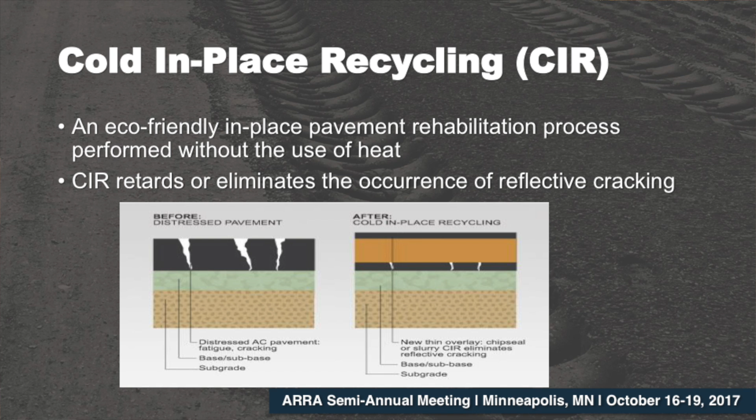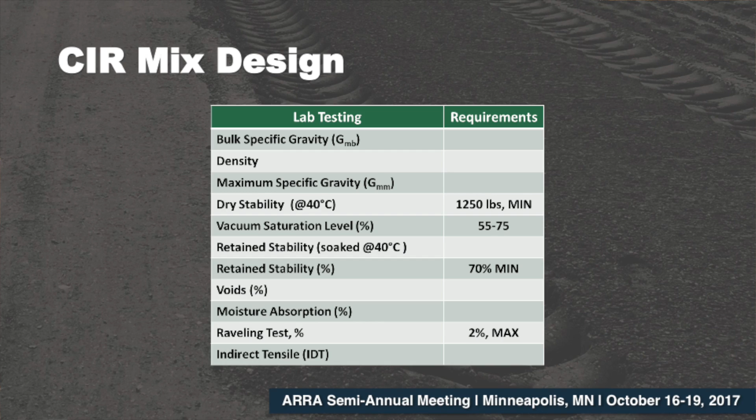So again, we're talking about cold-in-place recycling, partial depth rehabilitation with 100% RAP. Its main purpose is to retard or hopefully eliminate the reflective cracking coming back from the underlying pavement that's left behind, and it has shown phenomenal performance across many agencies within the state for many decades, as it has been improved over that time frame. This is just a quick look at the mix design criteria, and you can see that not all the standard criteria developed as the original guide spec out of Koch Materials is there. The indirect tensile test was not part of it, but you can see that the raveling test and the retained stability and the dry stability is a key component.

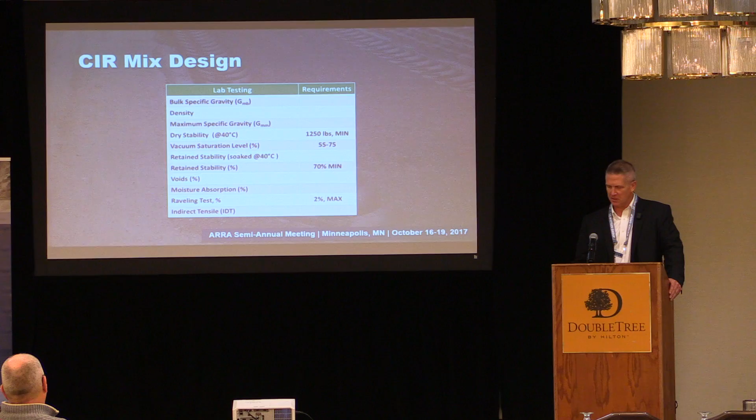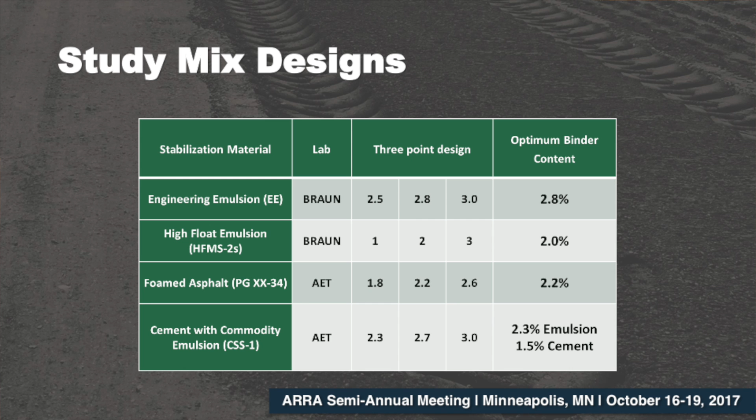So really, to set up these designs, we wanted to look at the most commonly used stabilization materials in Minnesota, and those are engineered emulsion, high float emulsion, foamed asphalt, and cement with commodity emulsion. Braun Intertech did the designs for the engineered emulsion and the high float emulsion, and AET did the design for the foamed asphalt and the cement with the commodity emulsion. As you can see here, they were all three-point designs, and the optimum binder content was determined with that three-point design, shown here on the right: 2.8 for engineered emulsion, 2.0 for high float emulsion, 2.2 for foamed asphalt, and 2.3% emulsion and 1.5% cement with the cement plus emulsion design.

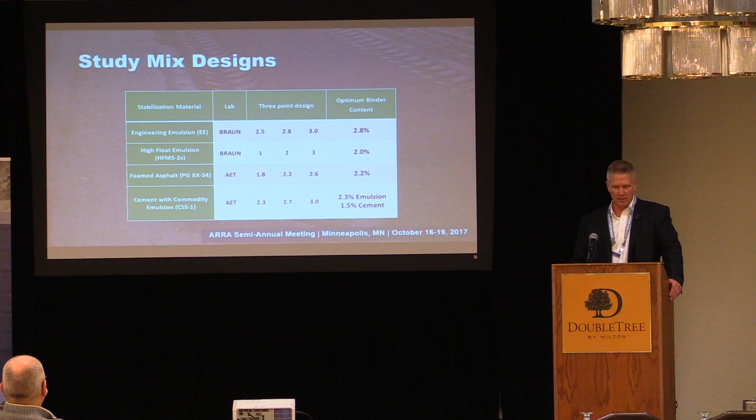So the whole purpose here was to take the designs of these different stabilization materials in the CIR environment and then look at fracture energy as a potential improvement in performance testing, not just for relation to crack resistance, but also wanted to look at fracture energy as a viable test to advance into the quality control, quality assurance environment. I think Brian's going to talk more about that when I'm done, and I think that is certainly a key progression to going forward with these different recycling in place strategies and rehabilitation focuses.

So what you see up here is we've got a beam, we've got a SCB and a DCT. I remember back in the old days when I'd visit with Todd Thomas about in-place recycling, we talked an awful lot about how the big emphasis was on stiffness, strength, structural coefficients. But that missing other end of the pendulum was the flexibility and fatigue resistance. A lot of times we talked about how beam fatigue would be a good test to do that, but it really wasn't practical to implement.

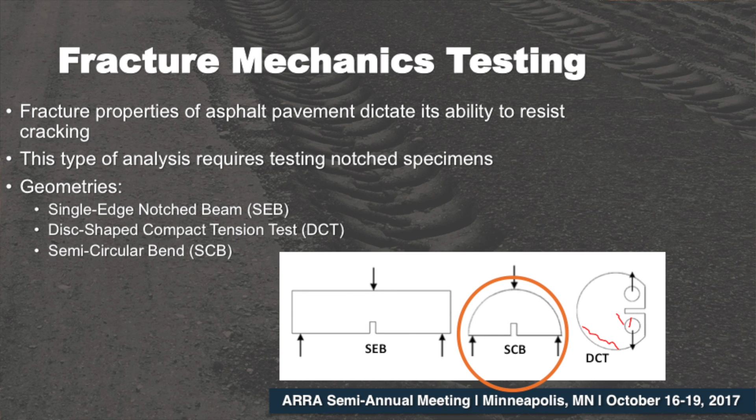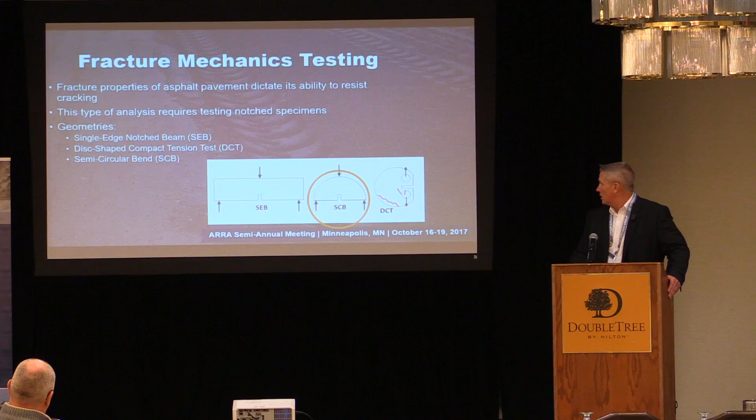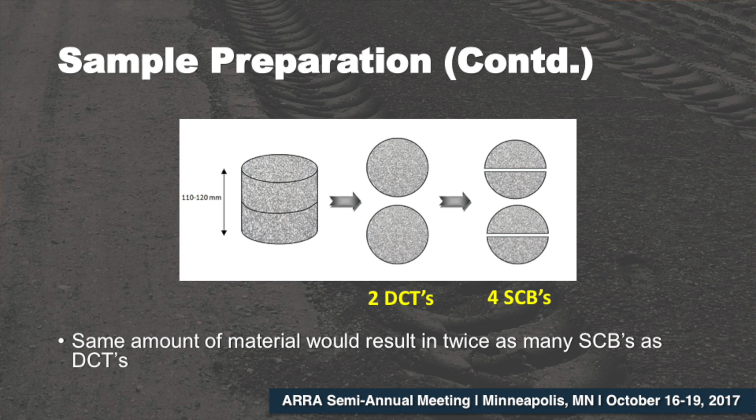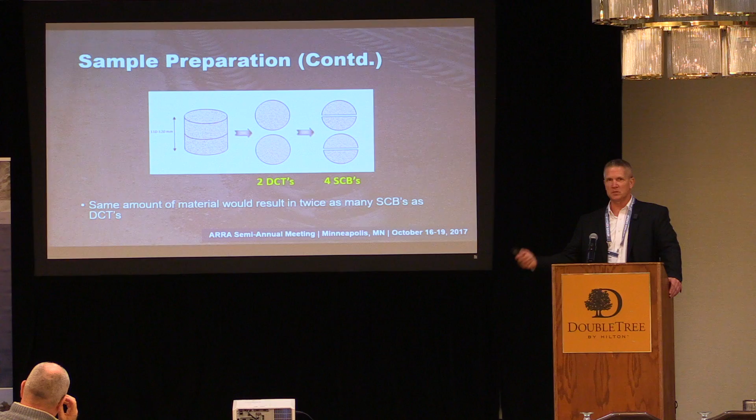In terms of sample preparation, you either have a gyratory specimen, or if you're talking about a field specimen, you're taking a core from the field. From that specimen, you can come up with 2 DCT specimens or 4 SCB specimens. As you advance to doing quality control and quality assurance in the field, the ability to get more samples from the specimens is certainly an advantage when you're looking at correlating the material being placed back to the mix design or what you're trying to achieve.

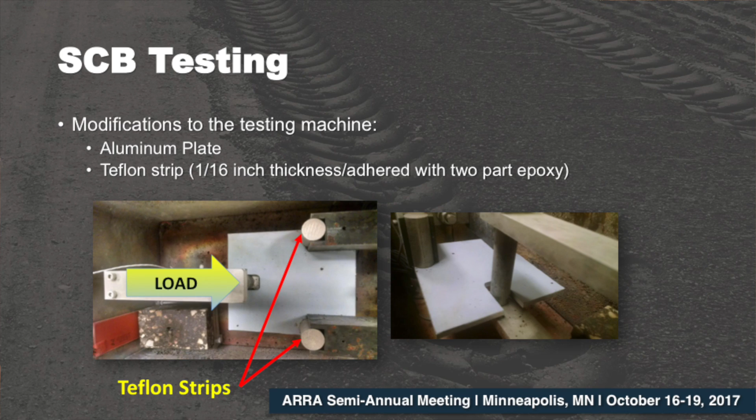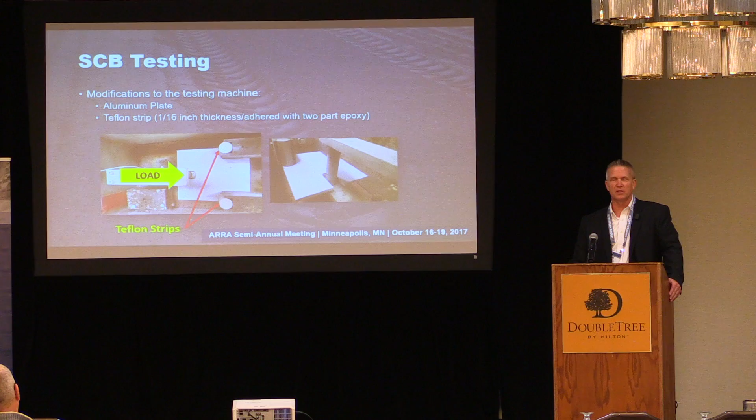We did some modifications to the SCB test machine, mainly to reduce friction - aluminum plate and Teflon strip were part of that. The standard normal testing mode on SCB is compression, as compared to DCT where it's tension. Beam fatigue is also compression, but we tried to run the standard procedure people were using for SCB, and what we found is, looking at the load as it relates to actuator displacement control...

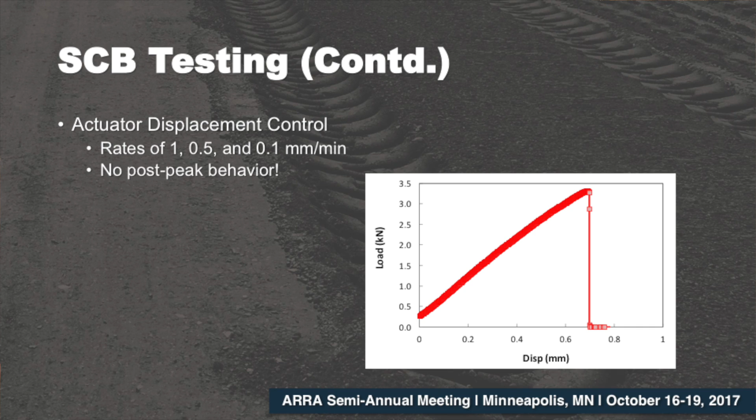We didn't get any post-peak behavior. When you look at a standard, you typically have a peak value, and then you get a tail where it runs down, and the area underneath that graph that remains would be the actual fracture energy, or the integral of that line.

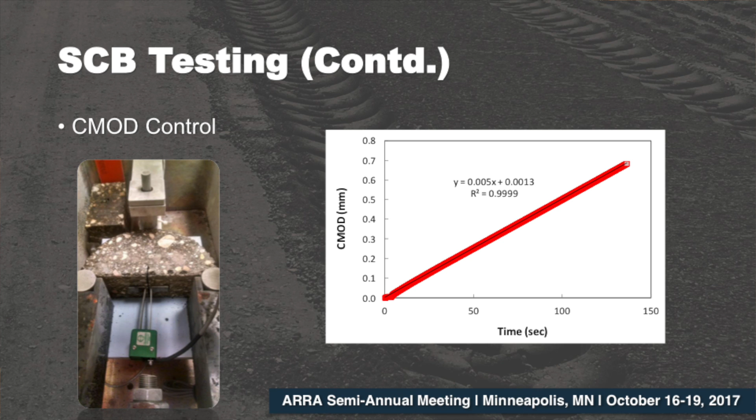So what Dr. Sabori came up with was looking at it from a crack mouth opening control rather than an actuator control, and through a number of repetition processes in this research, got a pretty good tail that came out from that.

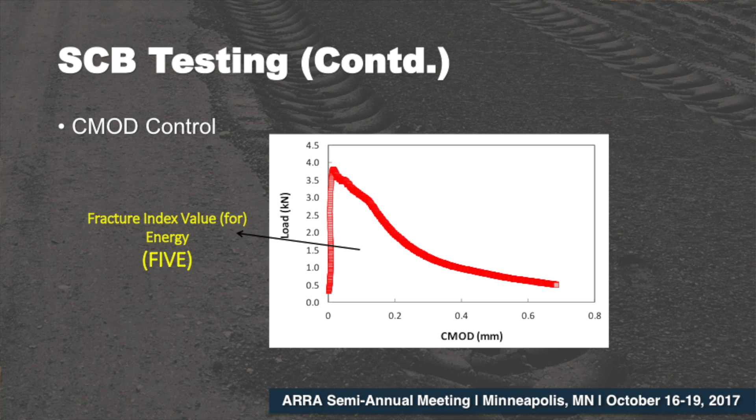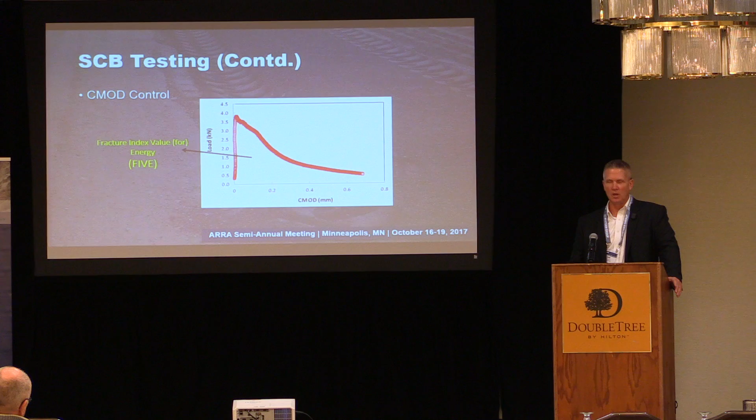When we went back and looked at a lot of the research, we found that a lot of people were having difficulty carrying out the fracture energy test to get the full tail of the sample. Using the CMOD control, we were able to get that, but in reviewing with different folks in industry and academia, even though your units are joules per meter squared, or a fracture energy value, it wasn't really following the accepted standard protocol, so we decided to call this value fracture index value for energy, or FIVE test.

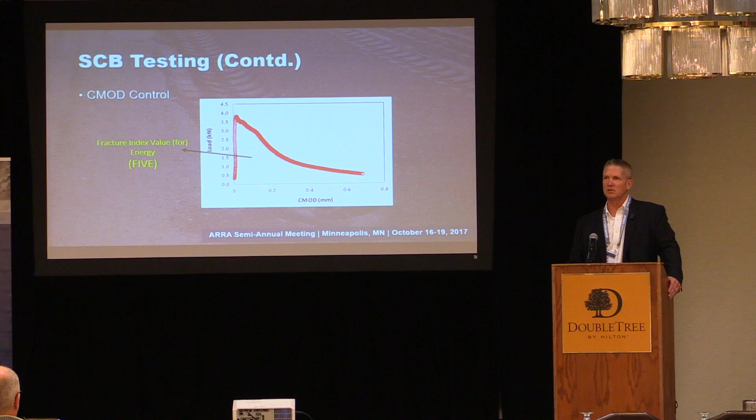The whole point there being that we wanted to have a practical test that was going to be able to differentiate between materials used in the process, and also be able to properly measure crack resistance, and provide a test result that's certainly going to be reproducible and reliable in the field.

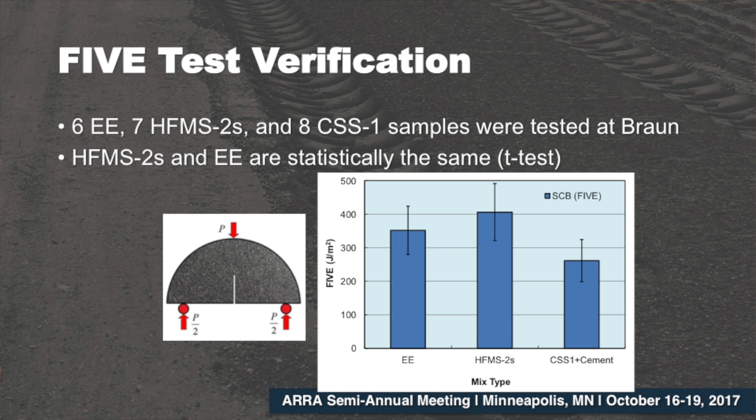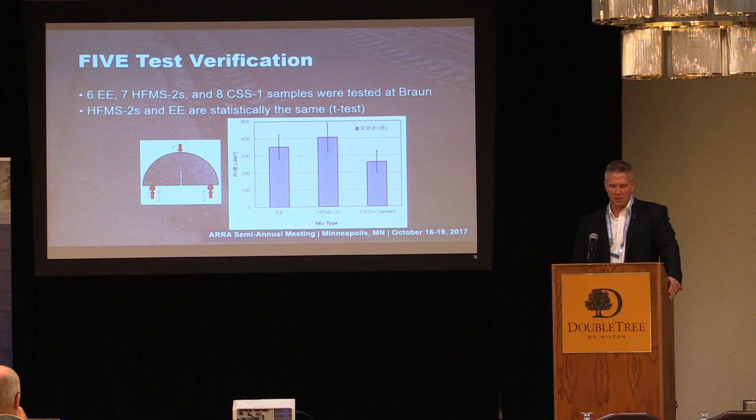Through a number of test verification steps - 6 engineered emulsion samples, 7 high float, 8 CSS1 samples - we were able to look at statistically, using the t-test, that the HFMS-2s and the EE are statistically the same in the results. The DCT testing results also showed very good correlation.

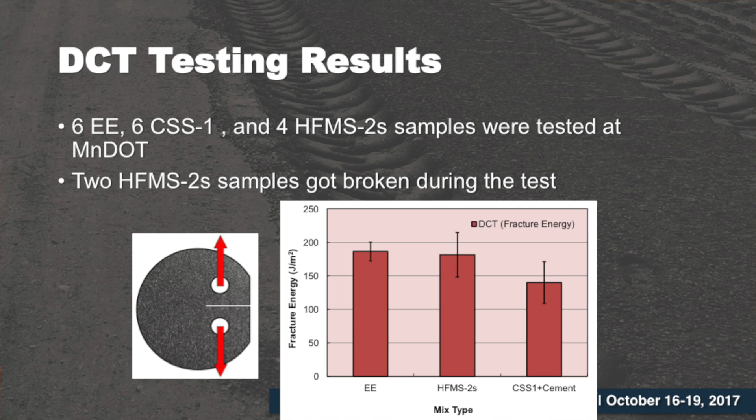One thing we did find, though, is that the high float samples were difficult to produce specimens from and maintain their integrity through the test, just because the test specimen itself didn't have a lot of integrity to it. That kind of related back to field performance, in terms of the high float emulsions often showing rutting in the field, just because they were really flexible, really soft materials - again, using solvents in the process of making the binder. So those were much more difficult to use in the testing environment, and the feedback from the DOT was negative in terms of their feeling about high float emulsions going forward.

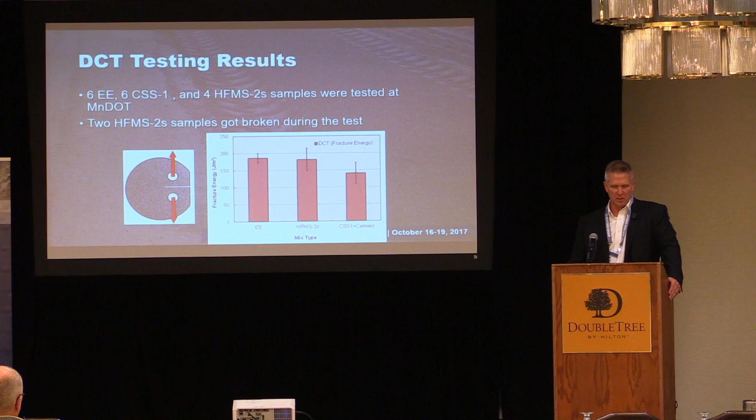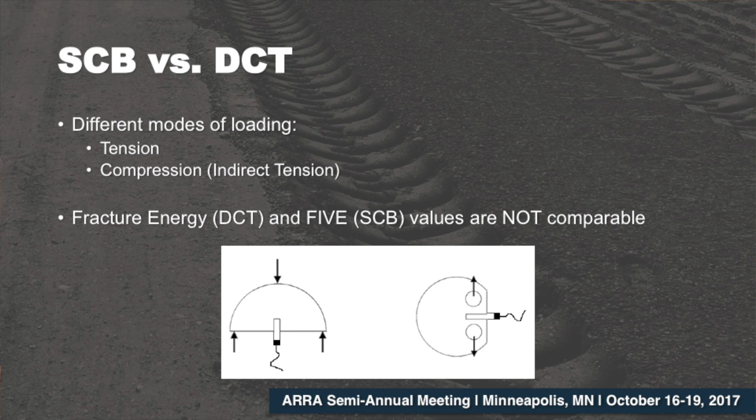So the focus was then more on the other binders, and we looked at the SCB versus the DCT. You look at the different modes of testing, where there's tension and compression, and you want to make sure that the values you're getting from those test results are going to translate into actual performance of that material in the field.

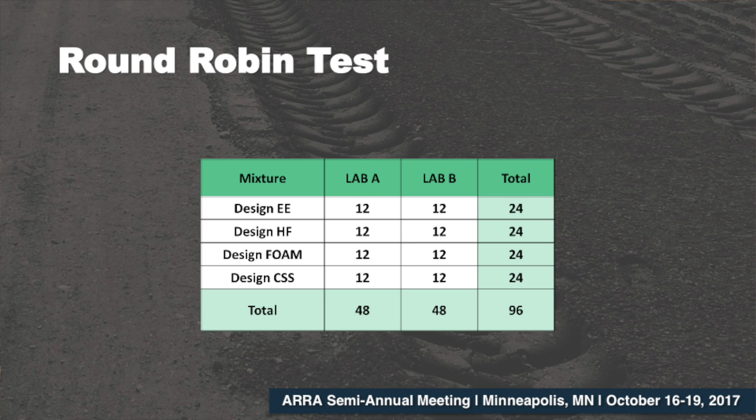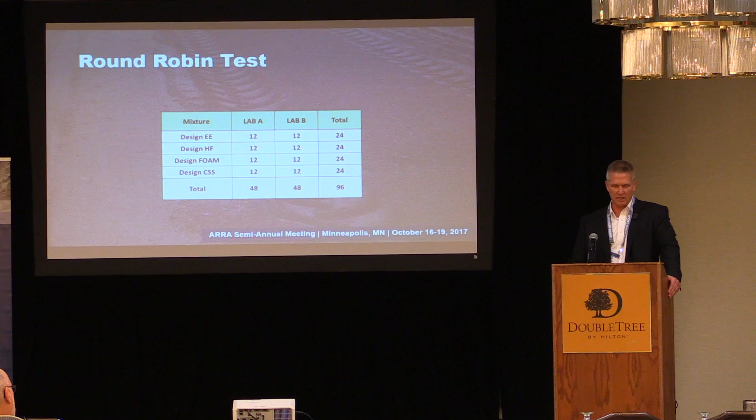One of the things that we also did was a round-robin test between the two labs, Braun Intertech and American Engineering, using samples produced in the mix design phase. We did a large number of sample sets, 96 samples total, to look at round-robin and interlab correlations.

You might ask why I'm spending so much time on the aspects of this test. But it's really important because the results, especially when translating from mix design to quality control and quality assurance, are very important to carry any type of rehabilitation process forward, to have reliability in distinguishing different types of binding materials and the process itself, in terms of providing agencies with the results they want.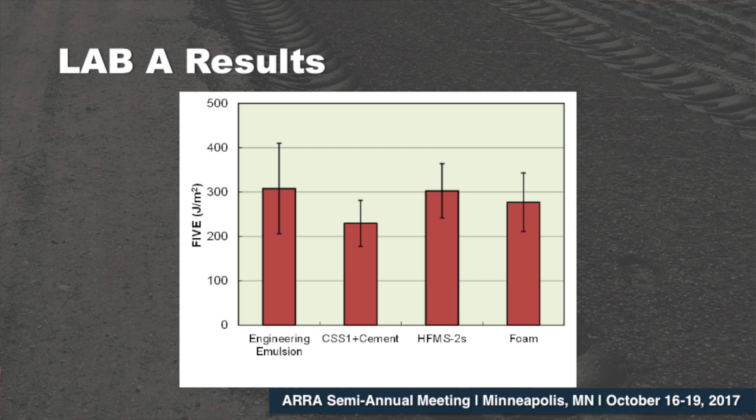So you can see here, Lab A results had engineering emulsion, CSS1 with cement, the high float, and the foam. All had fracture energy values for the most part between 200 and 300. Lab B results showed that the only thing below the 200 value was the CSS1 with cement.

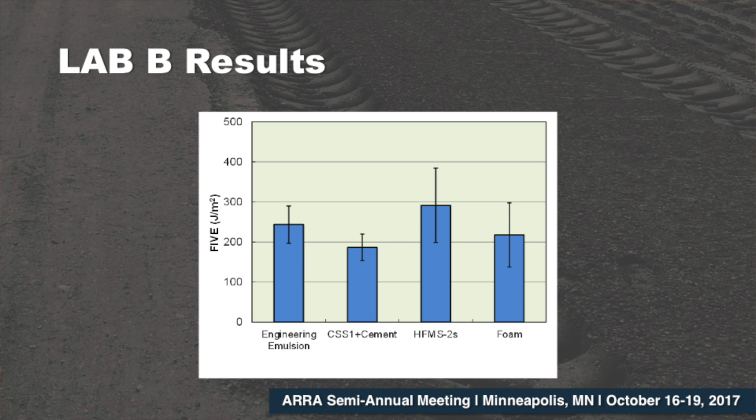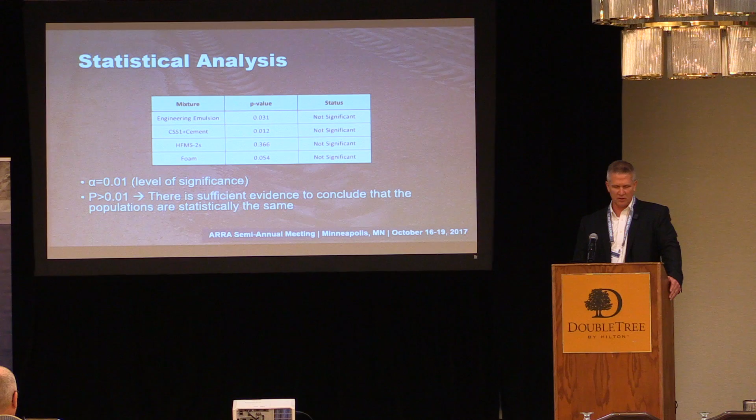Looking at the results and coming up with a statistical analysis on them, Dr. Sabori looked at that in depth and found there was not a significant difference in the statistical value, looking at the p-value in his statistical analysis of the populations.

So putting all that information together and looking at developing a performance specification and some type of criteria for the SCB tests for the fracture energy value, coming up somewhere between 200 and 250 seemed to make sense.

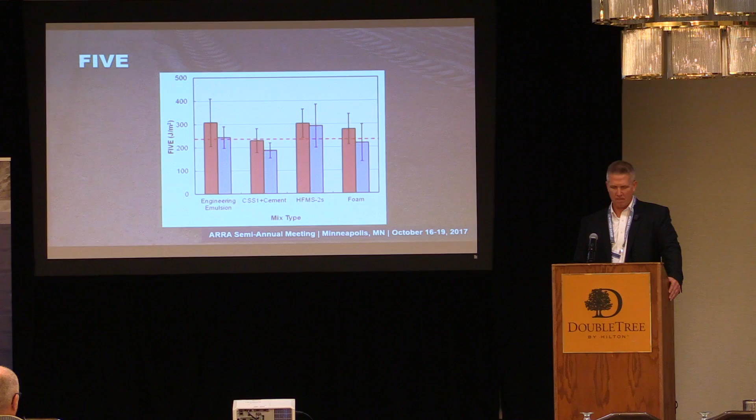So one conclusion would be that the fracture energy value of the SCB test is viable to optimize the cold-in-place recycling process, to look at those materials and distinguish between them. It also showed great potential to be used as a performance specification using the SCB, which is the most practical test that could then be translated into quality control, quality assurance.

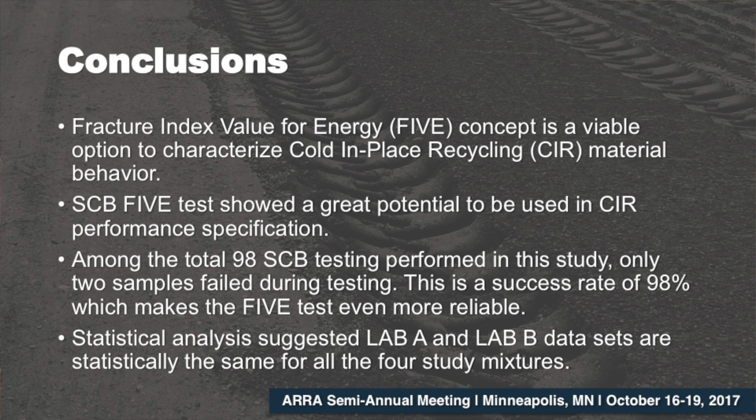Among the 98 SCB testing specimens performed in this study, only 2 of the samples failed during testing. This is a success rate of 98%, which makes that SCB test even more reliable. The statistical analysis suggested that the data sets are statistically the same for all 4 study mixtures.

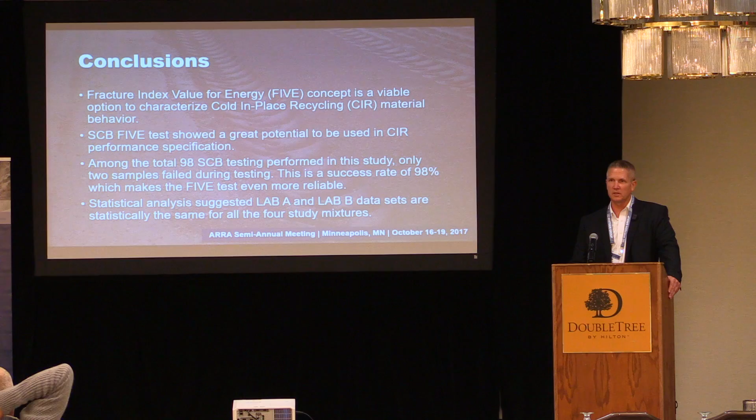So fracture energy certainly is showing that it's a viable alternative to look at crack resistance, and it's also potentially going to provide a means to advance into quality control, quality assurance, which I think Brian's going to talk about further. Field performance is required to validate the laboratory testing.

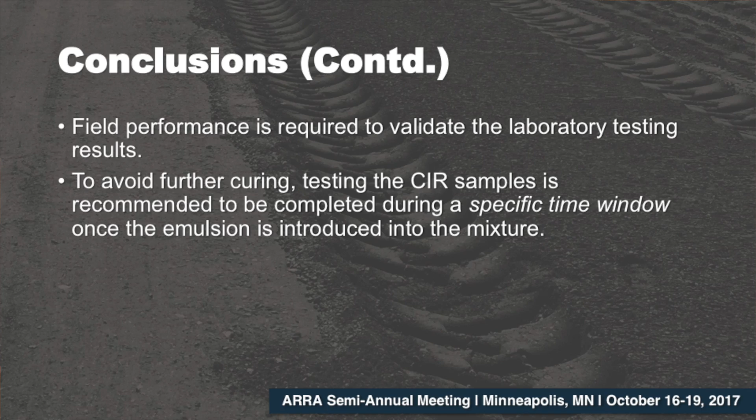I mentioned a little bit about some of the field performance with the high floats, or the very soft binding materials, and also looking at curing. Some of these materials, when you add cement, you're certainly going to affect the curing because that cement's going to tie up some of the water. The engineered emulsions are formulated to help drive out the water. The environmental conditions need to be addressed. So there's a lot of different variables that come into play in terms of establishing a curing or time window to look at these in relation to each other.

But the whole idea is that this is a great starting point. I think fracture energy is a great opportunity for us to be looking at the performance of these materials and getting a lot more information.

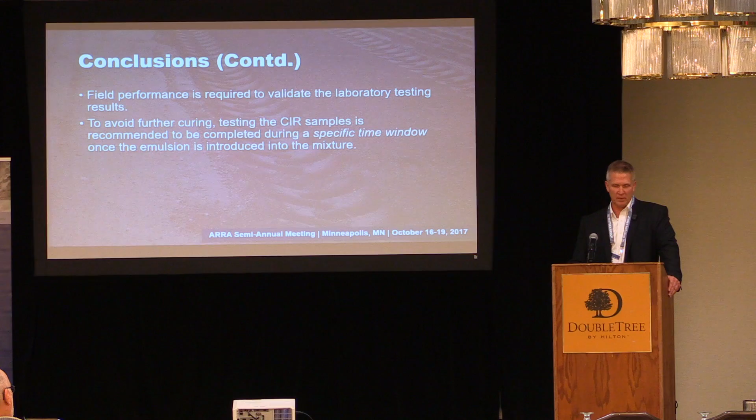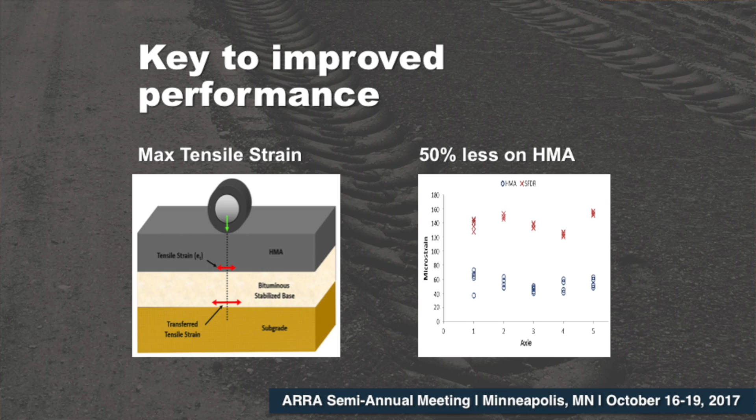And the reason that's very important, you'll be going out to the MnROAD facility today. I encourage you, hopefully you'll be able to go on the MnROAD mainline test section cells 2, 3, and 4, which are recycled in place using the SFDR process, stabilized full depth reclamation. The whole concept here is tying to performance.

And when you go out there, you'll see on those sections on I-94 Interstate Highway, they only had 3 inches, a little less than 3 inches, of hot mix overlay on top of the stabilized sections. And you think about that pavement section for an interstate highway, it seems pretty thin.

But the whole concept there ties in with what the previous speaker, one of the Andrews, mentioned: that the maximum tensile stresses are going to be driven down to the bottom of the bound layer. So when you are stabilizing with a binder and creating a bound base, you're going to be driving your maximum tensile stresses to the bottom of that bound base.

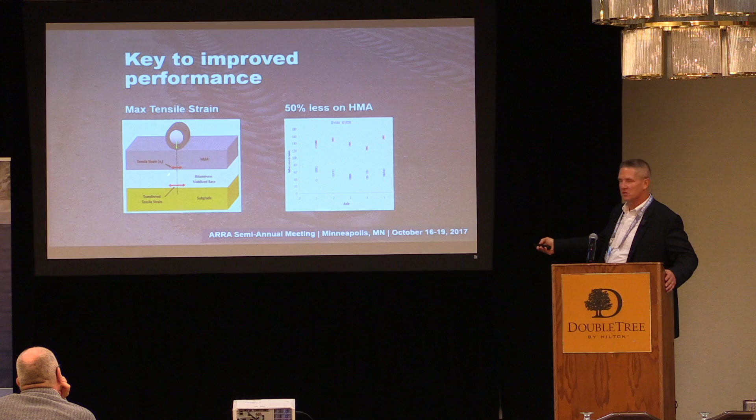Through strain gauges out at MnROAD, they found that the strain at the bottom of the hot mix layer was half of what that strain was at the bottom of the bound layer. So when you start thinking about the micro strains, that 70 to 100 value for perpetual pavement, and the fact that you're not getting the strains underneath that hot mix overlay that you would normally see if you didn't have a bound layer underneath it, that kind of shows you why that hot mix overlay is lasting much longer.

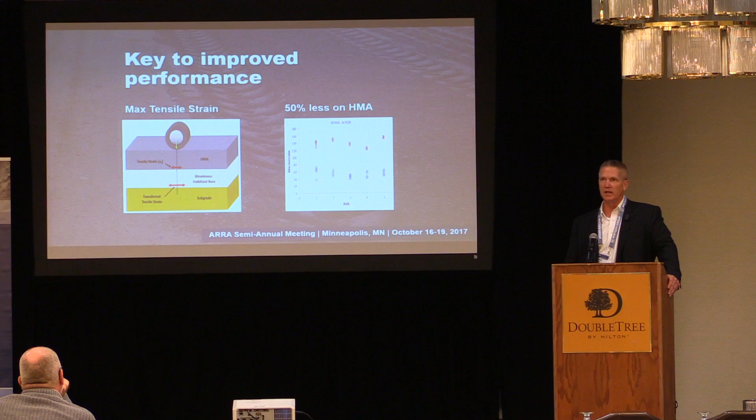On cells 2 through 4, they've actually doubled their design life, or are getting very close to that. It's designed for about 3.5 million ESALs, and I think they're approaching 7 million ESALs now, just now starting to show some signs of cracking. That's amazing performance that speaks for itself, and some of the research work done out there is helping us understand why that flexible component is so crucial, in terms of a full equation balancing both structure and flexibility or fatigue resistance in these recycle projects.

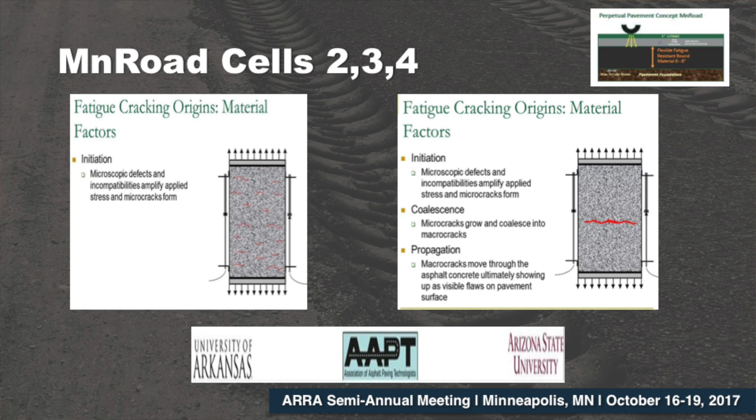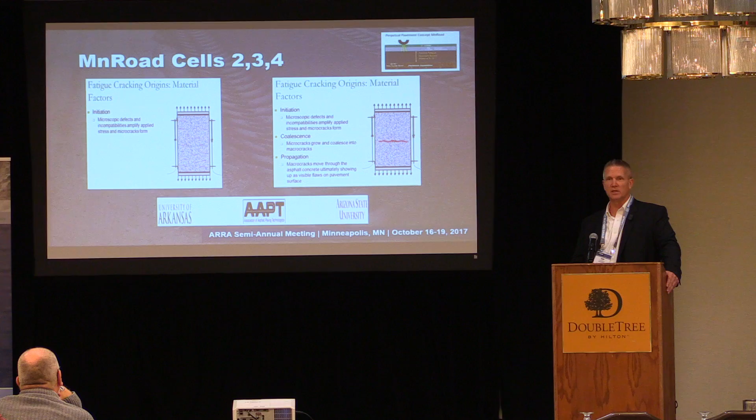One of the things I've been looking at is research done by the University of Arkansas, and might have been Andrew's work with AAPT and Arizona State University, looking at fatigue cracking origins, the initiation and how cracks coalesce and propagate through material. What we're seeing with this recycled in-place material is it does not behave like a hot mix material, and it doesn't behave like a cement material or something more brittle. Because of the higher void value and softer binders involved, when cracks do form, they have a hard time finding a path to propagate up through that overlay. That's why these overlays aren't showing cracking for much longer than they normally would on top of an unbound base. This is very interesting research that I think will be carried forward, in terms of why these are performing so well, and how a crack initiates and propagates through different material properties like in-place voids or binders, related to the flexibility and fatigue resistance of the pavement structure.

In addition, you'll see sections placed this year, and somewhat because of this research, foamed asphalt and engineered emulsion were selected for additional work on the low volume loop. Two test sections were placed using cold central plant recycling, where the material was manufactured off-site and brought out to MnROAD and laid through a paver. There are 2 sections of foamed asphalt and 2 sections of engineered emulsion, each with a surfacing of chip seal and overlay. So you've got one section of each on each roadway, and each of those sections uses different base binders in the manufacture of the material.

Some really interesting things to look at - I'm really happy to see foamed asphalt get out on that roadway. One thing I noticed that I haven't seen with foamed asphalt in the past is very good coating on the coarse aggregate particles in the foamed asphalt section when I was out there. Normally foamed asphalt really coats the fine aggregate, which holds those coarse aggregate pieces in place. But talking to other people in the industry, I've found that certain binders, certain asphalt cements, as related to the half-life and the expansion ratio in combination, provide better coating in the foamed asphalt environment. I think the asphalt supplied here is certainly one of those, because the coating is excellent - probably the best I've ever seen on that material.

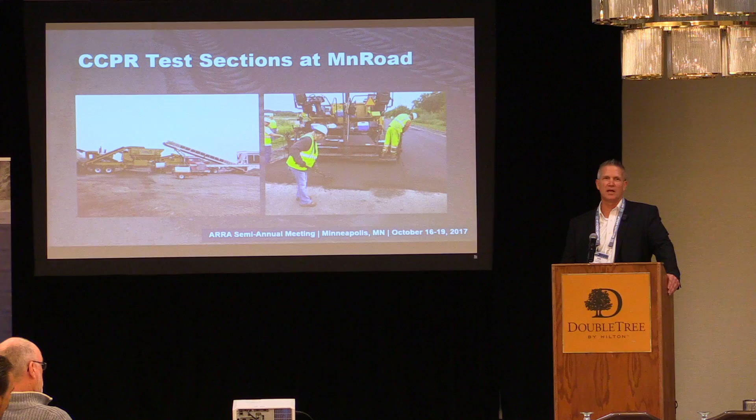What did you use for CIR? How do you control the durability? Don't hold me to this, but I believe it was based on the number of gyrations used in the design, which was probably like 30 or 35. I don't think we did. But again, that's probably getting into this whole crack initiation and propagation, which is probably going to be a huge factor going forward, especially in the quality control aspect of it. And the fact that they're doing intelligent compaction now on recycled in-place jobs - not so much measuring the in-place voids, but more making sure uniform applications of density are applied across the entire roadway, which is pretty important.